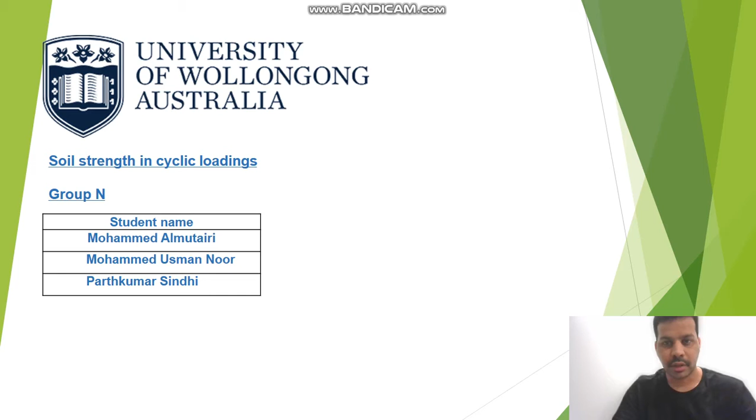We are Group N, Mohammed Almutairi, Mohammed Usman Noor, Parthkumar Sindhi. The topic of this presentation is about the peak strength, shear strength, and internal frictional angle. The aim is to study the effect of cyclic loading and how it changes the soil strength. In this presentation, the main focus will be on peak shear strength and changes in internal friction angle.

Cyclic loading can be used to describe how a material body responds to being subjected to stress and strain over time. One of the most well-known cyclic loading scenarios in soil deformation occurs during an earthquake. The term earthquake is the movement of seismic waves that originate underground and, in most circumstances, concentrate at plate tectonics. These seismic waves, which come in many different forms, impose on the dirt irregular and unpredictable small and large-scale motions.

It is typically known that an earthquake can entail major threats to population centers, deaths, injuries, damage to property and infrastructure, and occasionally catastrophic repercussions. Therefore, it is highly important to research the material properties of soil. It is critical to comprehend how the soil might affect seismic waves, commonly termed site effect, as well as the impact the seismic waves may have on the soil's properties.

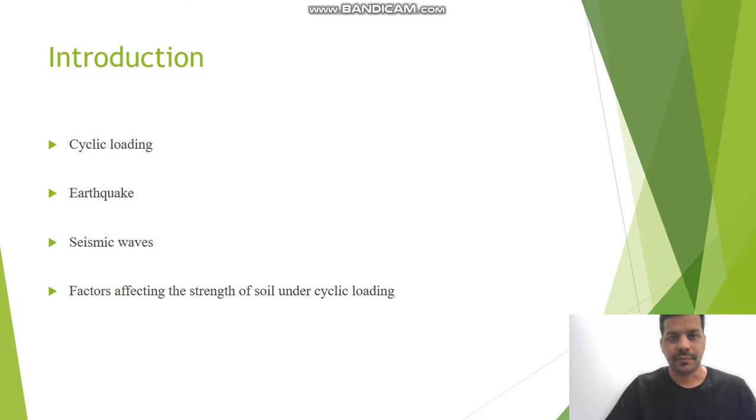Aim and objective of project. Our main aim is to study soil strength in case of cyclic loading. Our objective is to investigate the following experiments. One of them is the dynamic cyclic triaxial test, and another one is pile soil interaction in loose sand.

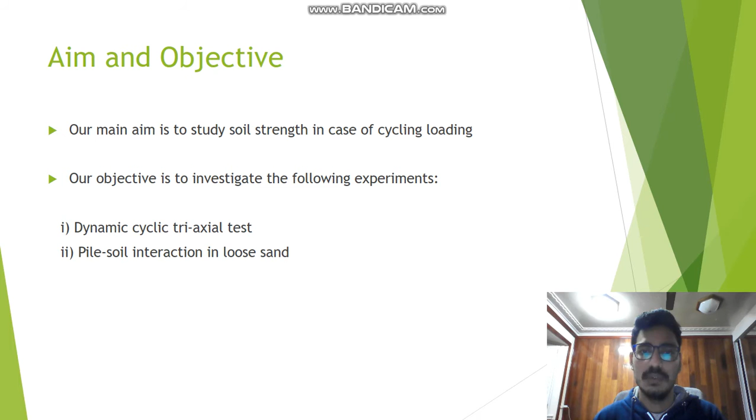Problem identification. Soil particles experience displacement, rotation, and deformation under cyclic loading, which results in structural stress in soil. Cyclic movements lead to softening of surrounding soil and reduction in soil resistance. Pile foundations are subjected to cyclic loading due to the effect of wind, wave, or traffic movement, which affects strength as well as stiffness of loose sand. So it is important to investigate soil strength under cyclic loading.

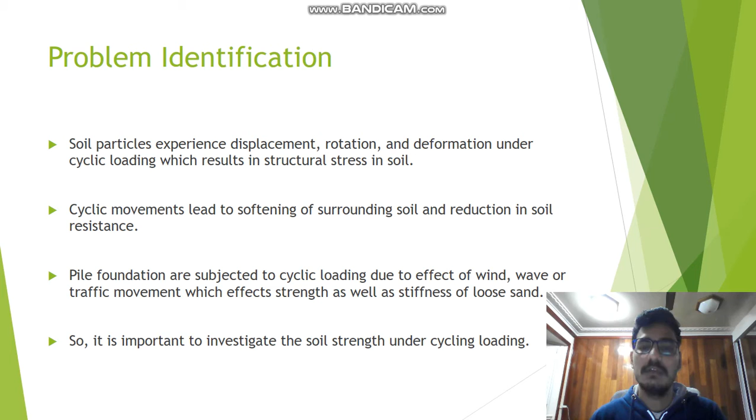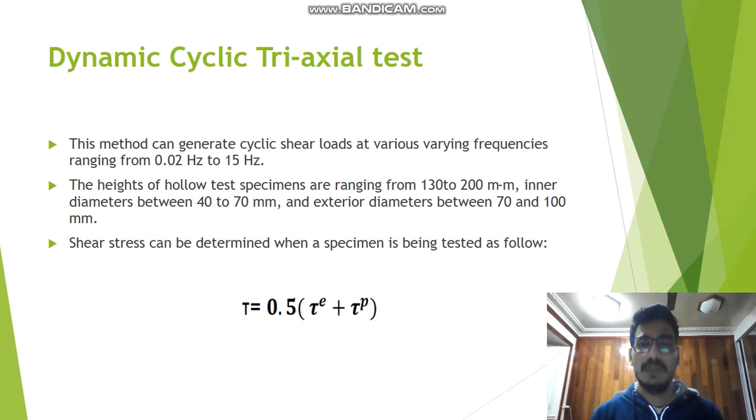Dynamic cyclic triaxial test. This method can generate cyclic shear loads at varying frequencies ranging from 0.02 Hz to 15 Hz. The heights of the hollow test specimens range from 130 to 200 millimeters, inner diameters of the specimens between 40 to 70 millimeters, and the exterior diameters ranging from 70 to 100 millimeters. Shear stress can be determined when the specimen is being tested by the following equation. Here is the complete assembly of the cyclic triaxial test which is used in the experiment, and the brown one in the diagram is the soil specimen used in the test.

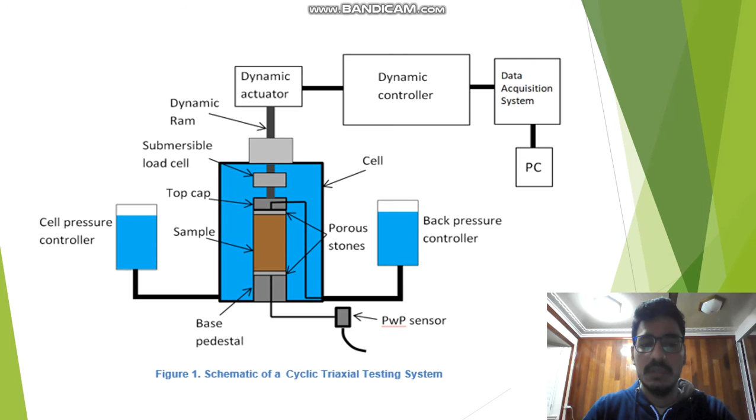The second method we use is pile soil interaction in loose sand. It has two models. The first one is BEM, boundary element model, which uses a P multiplier technique to incorporate group effect, but this method is over predicted. And the other one is FEM, finite element method. It incorporates stress conditions using Abaqus software, and this method is under predicted.

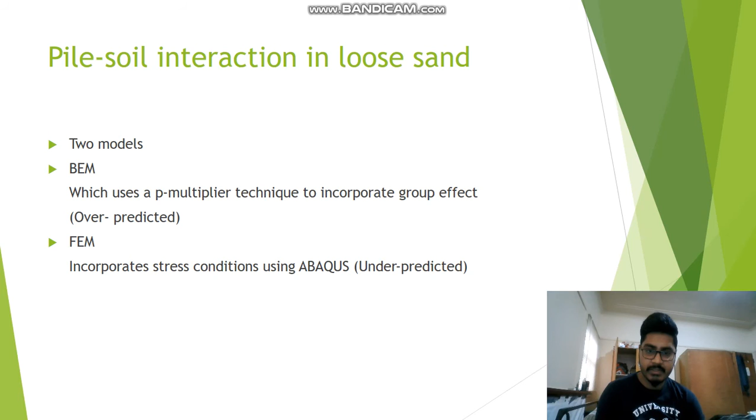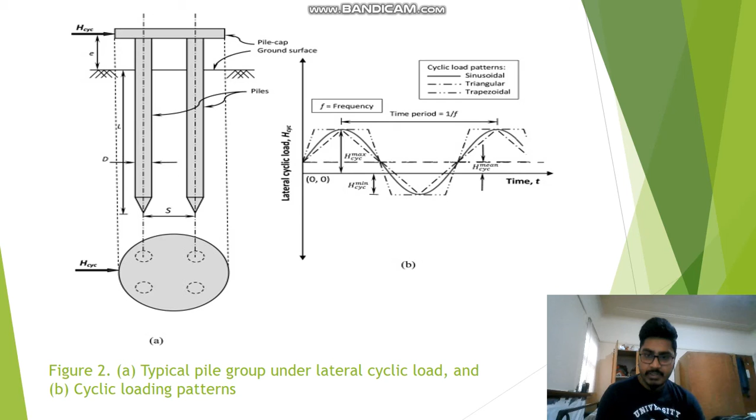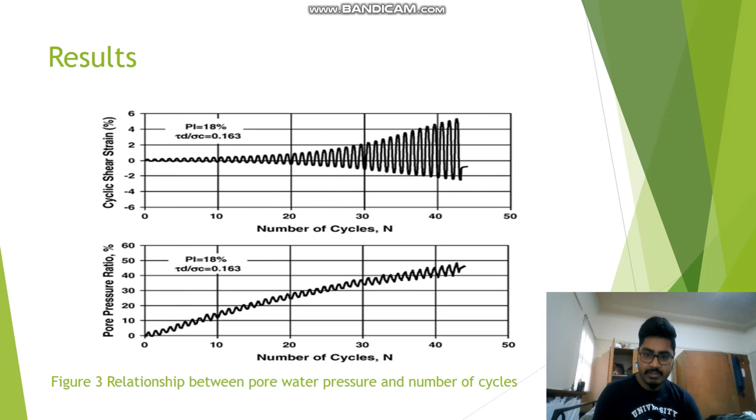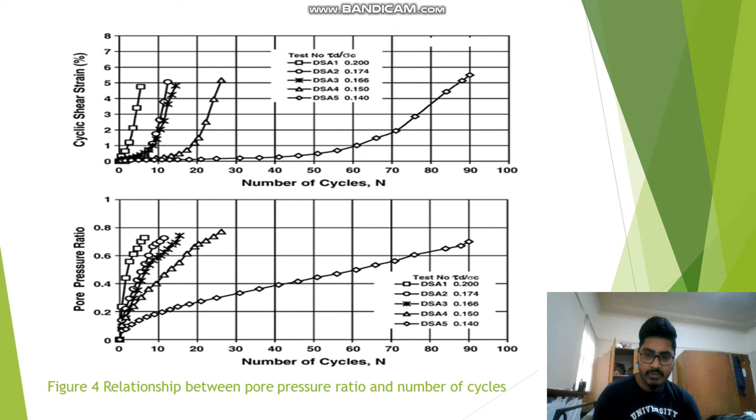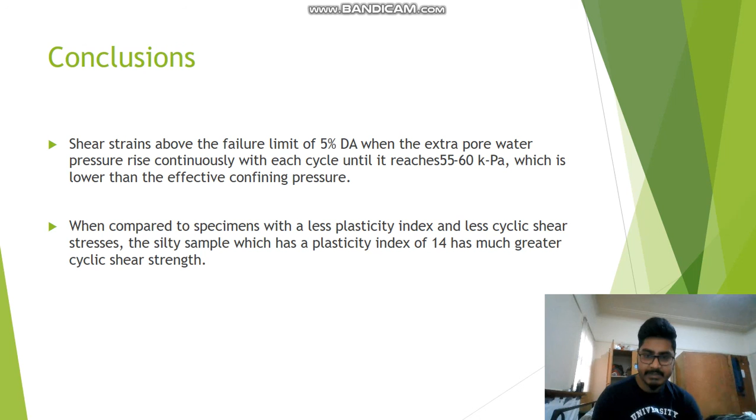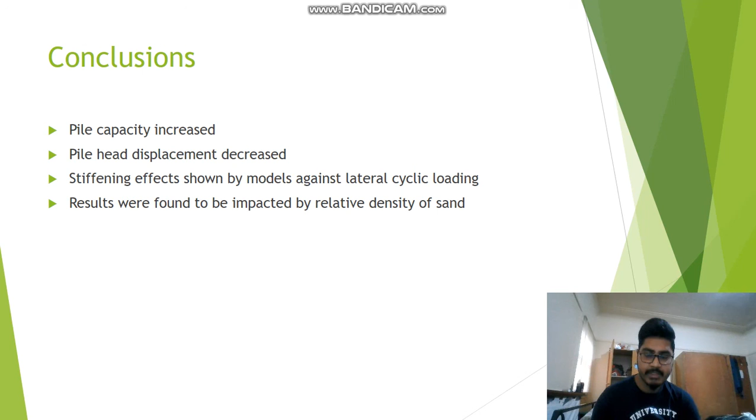For the second pile soil interaction method, we can conclude that pile capacity is increased in this method, and pile head displacement is decreased, with stiffening effects shown by the model against lateral cyclic loadings, and the results were found to be impacted by the relative density of sand samples.